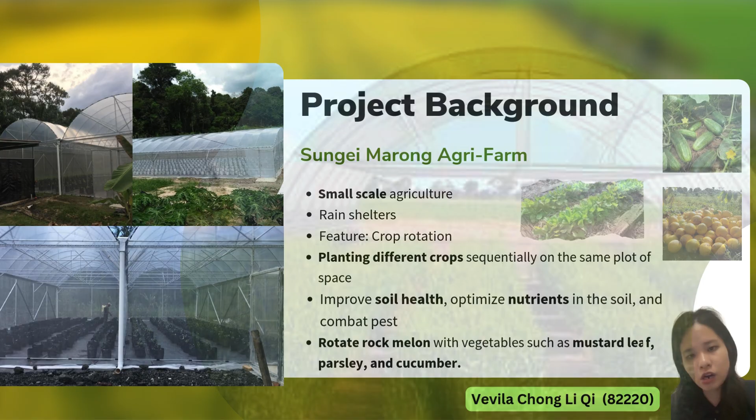Another feature of the farm is crop rotation, planting different crops. The farm faces two challenges. Firstly, harvesting heavy rock melons requires manual handling, which is time-consuming and physically demanding.

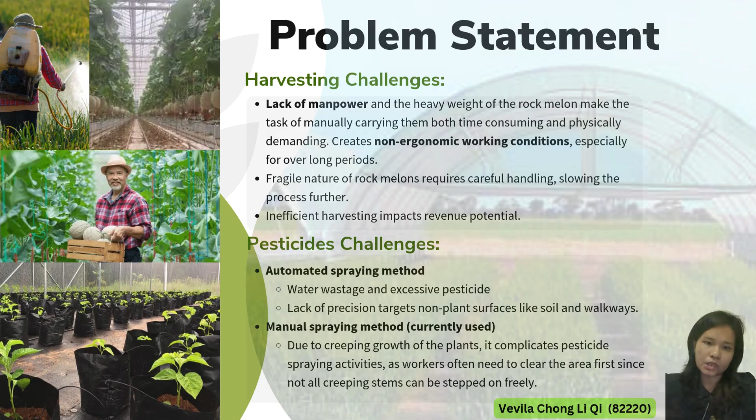The second challenge is pesticide application. The farm uses automated and manual pesticide methods, each with limitations such as water wastage and complicated spraying activity.

For our product design concept, that is ZipCart, a system designed to simplify harvesting and pesticide application, powered by a DC motor. It runs on a cable for smooth, semi-automated operation. The cart features adjustable height and an easy-to-remove basket for loading, plus a sensor to ensure efficient performance.

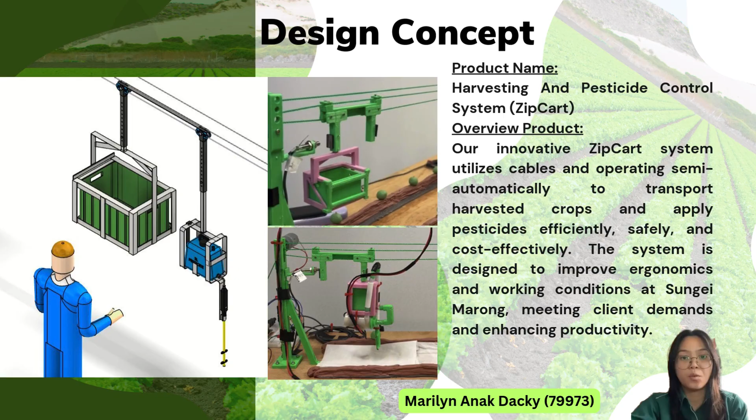Our ZipCart design is meant to improve working conditions and productivity at Sungei Marong, meeting client needs in a safe and cost-effective way. Let's take a look at an overview animation of our product functionality.

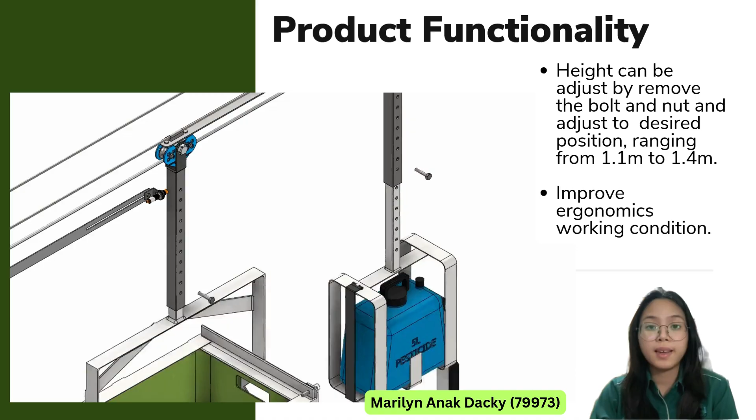To adjust the height, remove the bolt and nut from the square hollow steel pole and slide the height adjuster to the desired position, ranging from 1.1 meter to 1.4 meter.

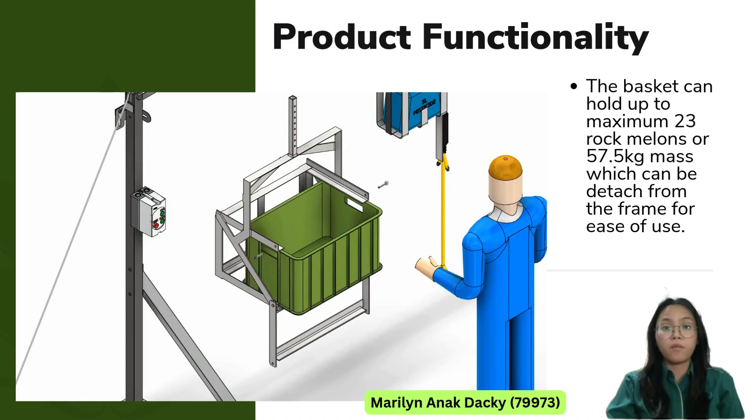To remove the basket, detach the key pins on both sides of the frame. This allows the polypropylene basket, capable of holding up to 23 rock melons or a maximum weight of 57.5 kg, to be removed for convenient loading and unloading.

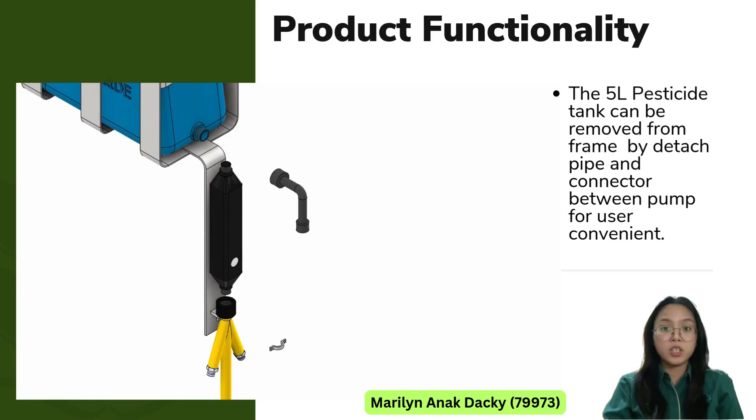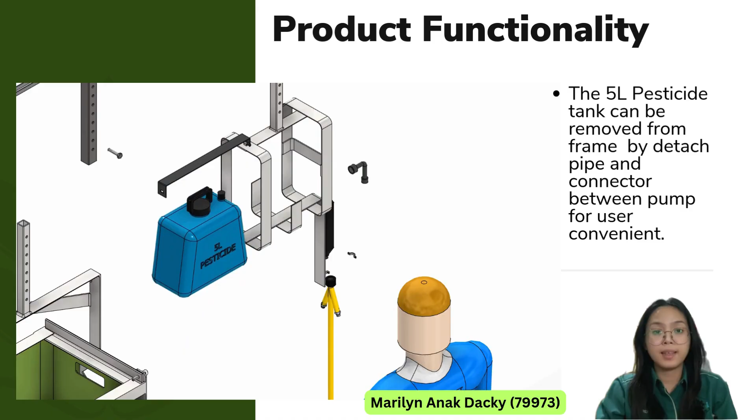To remove the 5-liter water capacity tank, first detach the pipe and connector between the pump and tank. Then slide the tank out from the opposite side of the frame, and once refilled, slide the tank back into position, reattach the pipe, and secure the connector, ensuring the system is ready for pesticide spraying.

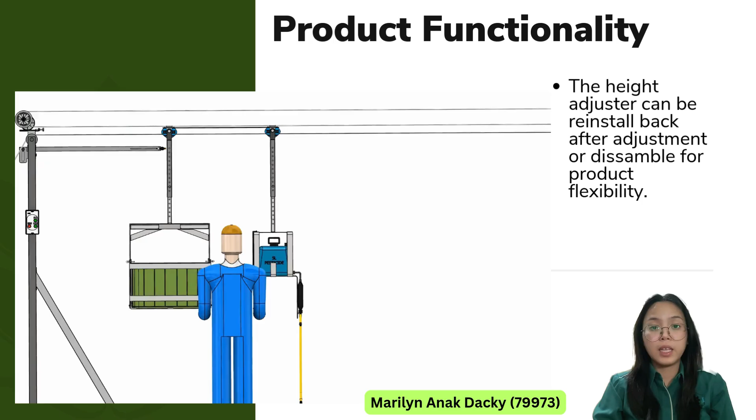After completing the necessary adjustments based on preference, reinstall the height adjuster, sliding it into position and securing it with the removable bolts and nuts.

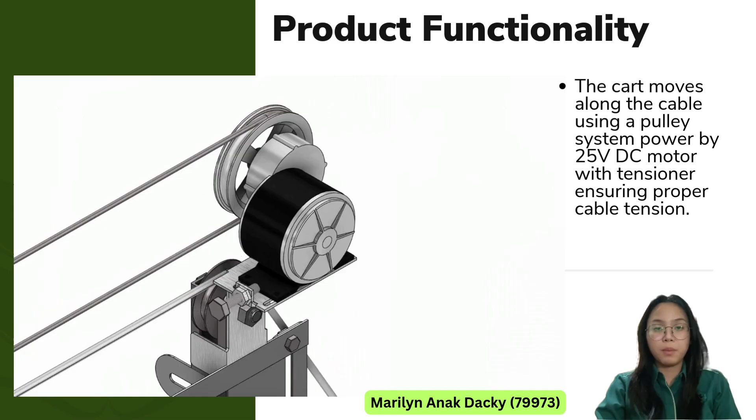The cart moves along a zinc galvanized steel cable powered by a 25-volt DC motor, with a cable tensioner ensuring proper tension. This ensures smooth movement during harvesting and spraying.

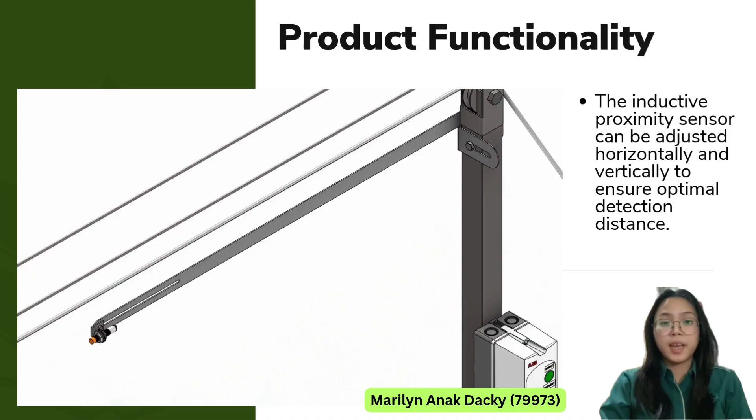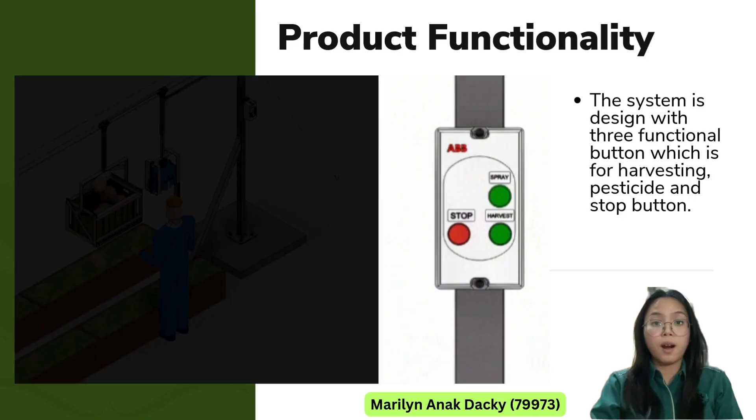The inductive proximity sensor can be moved vertically or horizontally to ensure optimal detection distance or angle based on user preference. The system is operated using 3 simple buttons: one for harvesting, one for pesticide spraying, and a stop button to release the motor brake or stop the operation.

Now we'll proceed with the materials applied in our product, ZipCart, which has 4 main components: poles, cables, ZipCart frame, and zipline pulley.

For poles, we selected steel ASTM A36 with thickness of 3 mm, height of 2 meters, and width of 2 by 2 inches. For cables, we selected zinc galvanized steel, whereby the main cable size and the motor cable size is 8 mm. For the ZipCart frame, we used steel ASTM A36 with thickness of 3 mm.

The weight of the basket frame is 13 kg, while the pesticide tank frame is 7 kg. Lastly, for the zipline pulley, we selected stainless steel, which can carry a load of up to 15 kN.

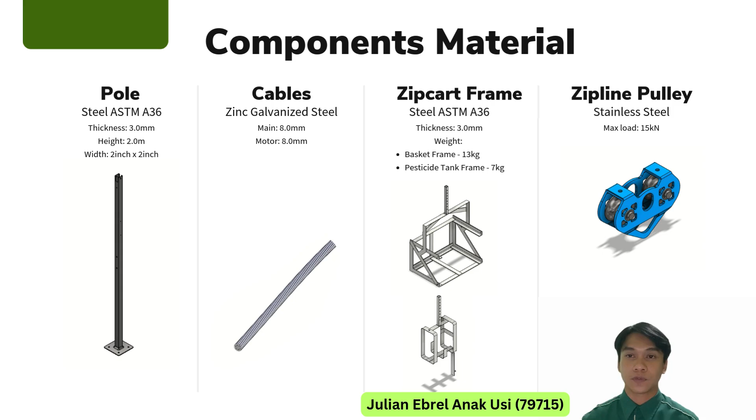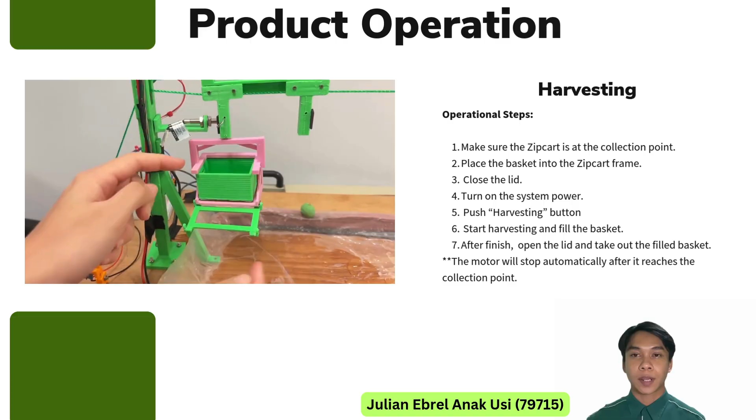Next, we will demonstrate the operation procedure for harvesting. First, make sure the Zipcart is at the collection point. Second, place the basket into the ZipCart frame and close the lid.

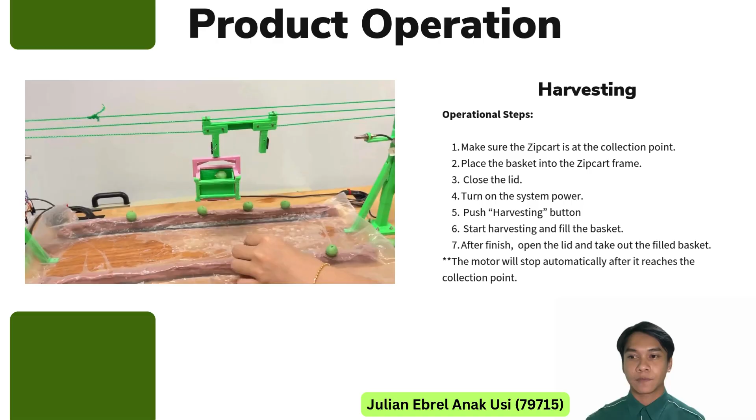Then turn on the system power and push the harvesting button, and start filling the basket. The motor will stop automatically after it reaches the collection point.

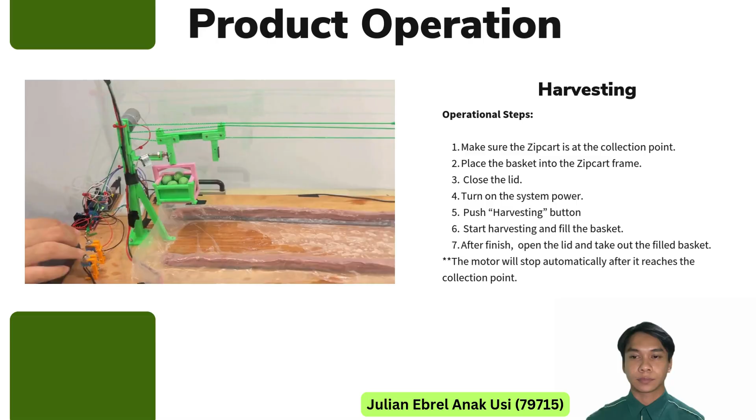After finishing, open the lid and take out the filled basket, then close the lid.

Now we will demonstrate the operation procedure for pesticide control. First, we need to fill up the pesticide mixture into the tank beforehand and make sure the Zipcart is at the collection point.

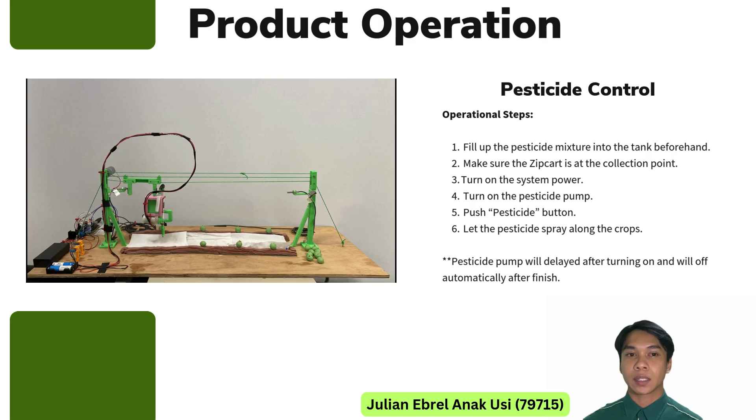Now turn on the system power and turn on the pesticide pump. The pesticide pump will delay after turning on, then push the pesticide button, letting the pesticide spray along the crops.

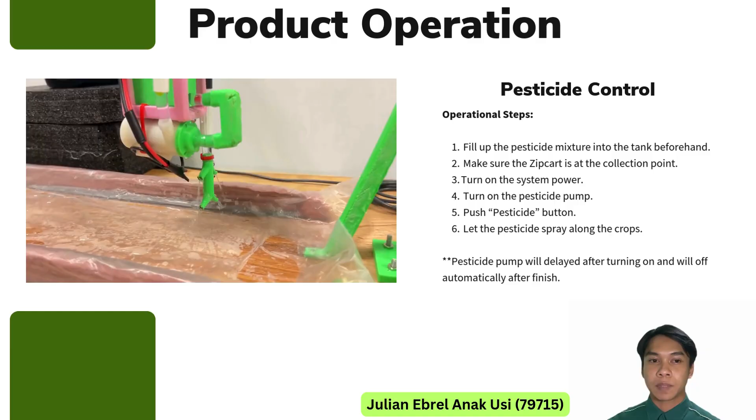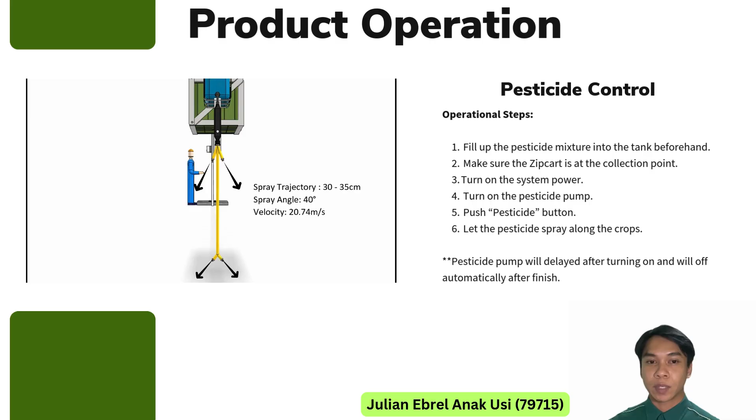By design, the nozzle of the pesticide consists of two different angles: the top nozzle is 70 degrees, while the bottom is 30 degrees, and both nozzles are 0.8 mm. The purpose of the different angles is to ensure a spray angle of 40 degrees, with the spray trajectory covering a plant at a distance of 30 to 35 cm and a height of 1 meter above the ground.

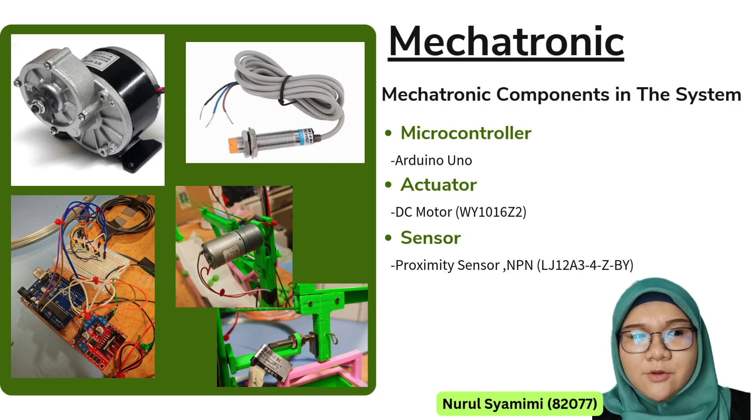In mechatronics, these are the components available in the system. First is the microcontroller, and we will use Arduino Uno to control the sensor and the DC motor using C++ coding for communication. The actuator is the DC motor, and last is the sensor, which will be a proximity sensor.

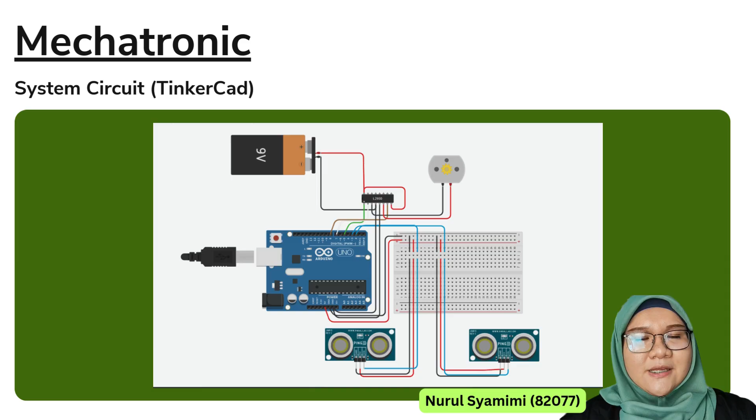This is the system circuit. We use Tinkercad to simulate the circuit for our system. There is a slight difference in the Tinkercad components; for example, the ultrasonic sensor represents the proximity sensor since there is no proximity sensor available in Tinkercad.